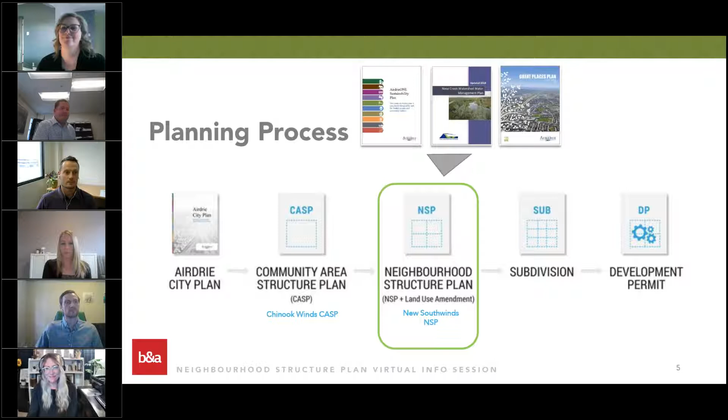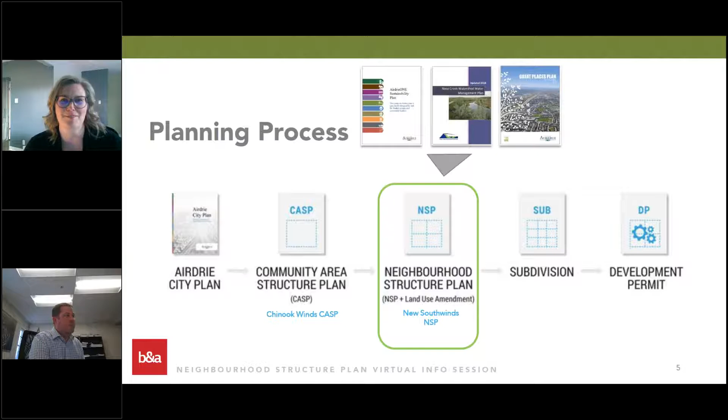So the planning process, where are we? We are currently at the neighborhood structure plan phase. Planning within all municipalities has a process. From the moment lands get annexed and then become a reality, they all fall under the city plan. The city plan is the guiding policy that guides all things within a city. From that, the next level is a community area structure plan, and these lands certainly fall within the Chinook Winds CASP. After that, we get a little bit more fine grain. We have the neighborhood structure plan. And then we keep going down the process till we get to development, houses, parks, and all those other things. When we're at the neighborhood structure plan phase, there's also a number of guiding policies that we look to and try to adhere with.

Here's some of the examples that we've noted, between the sustainability plan and the Great Places plan, and certainly there's always a watershed management plan that we have to adhere to for each development within the city. So today we're going to talk about the neighborhood structure plan. I hope to give a little bit of clarity too around other components of our adjacent lands. So I'm going to jump right into that.

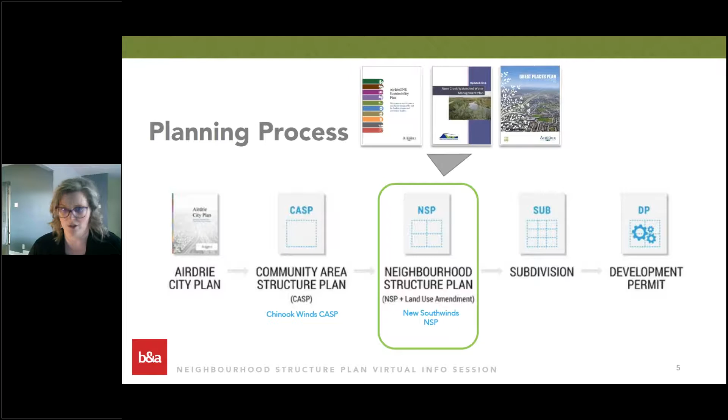So location and context. I know there were some comments that we've seen in regards to the names. So the fuchsia area is our Chinook Winds CASP boundary. Within there's a number of communities: Chinook Gate, Cobblestone Creek, Prairie Springs, Windsong, and South Windsong. And I know we've heard some comments about, we actually don't call it South Windsong, we call it Southwinds. And so I would say by planning policy, it was named Southwinds originally, but that's the only place it stands. I know the community next to us is Southwinds, and our intention is to extend that and have Southwinds be the community in the southern portion of that community area structure plan. And so hopefully that gets some clarity. The only other place that you'll find that, I think, is very detailed documents that Mattamy submits to the city.

So certainly it's not as if you'll see South Windsong in other places. So the lands that we have here, we have three landowners: Mattamy's got a portion, the city of Airdrie does, as well as the Rocky View School Division. And so between them all together, we have a plan that's sitting about 155 acres. I've got a few site photos. The interesting thing about the land, the majority of it is flat. There are a couple of natural features. There's certainly the dry creek that is diagonally crossing the site in the northwest corner. There's also a low point that sits in the bottom southeast corner, and we've got some high points with a couple of knolls.

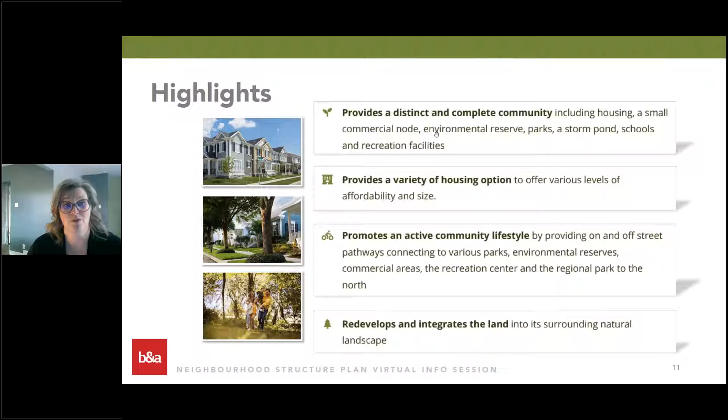Promoting an active lifestyle, we design our streets and pathways to connect well, ideally in an efficient grid. On-street paths and pathways give opportunities for bikes, pedestrians, and vehicles. We also integrate the land with the natural landscape where it's available, addressing and celebrating it through our plans.

There's an opportunity to also enhance those natural areas. Sometimes not every natural area is the nicest natural area. I've certainly seen many storm ponds or wetlands in my day that could be enhanced, so there's an opportunity there as well to actually make that an even nicer creek area throughout the plan.

And then creating social interaction and a sense of community, and that comes from nodes and open spaces. When we can offer places where you can gather, meet for a coffee, that becomes the heart of a community. Those are very important for maintaining a strong sense of community.

And then finally, utilizing infrastructure effectively. That's something the city wants us all to do. If we have efficient services, they have efficient maintenance. So certainly the services provided to us, we want to make sure we can connect in, and that relates back - there are times we might design things and the engineers say, oh, you've got to do something a little different because I'm not being as effective as I could be. So certainly plans change, and that's part of the piece.

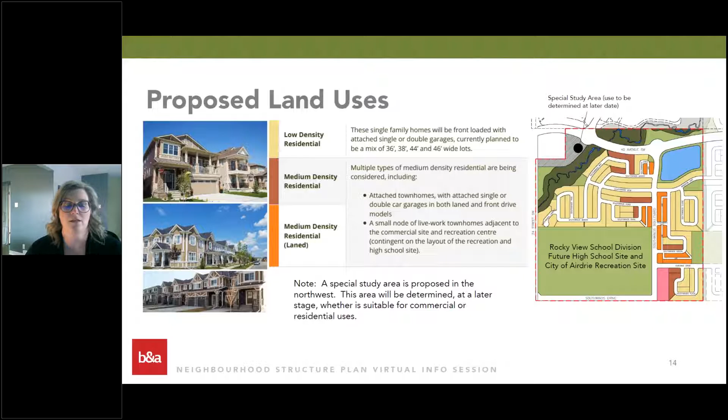This is showing a little bit more detail around those proposed land uses. Mattamy has built a number of product offerings within their other two communities next door, between single family homes that range in width from 36 to 46 wide lots, and medium density, which is our row homes - you can get those in laned and laneless, a couple different options. I'm going to switch this one.

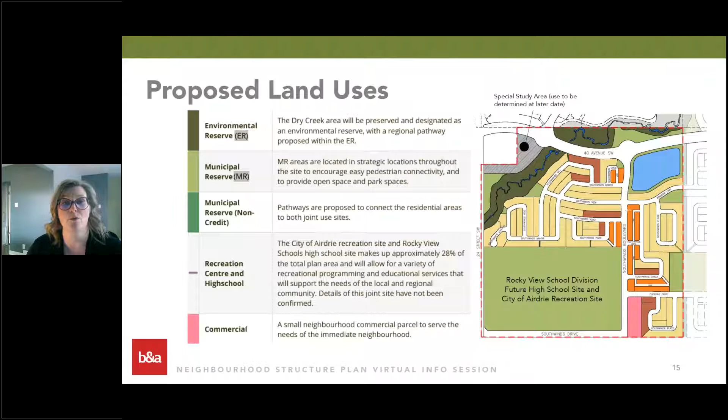The environmental reserve is also categorized, and our municipal reserves, which you'll see in the lighter green, and our commercial sites. So the product would be very similar to what you know adjacent to the site, and certainly if there are opportunities for different product within the market, that's something Mattamy continually looks at, seeing where the market is wanting to go, or what kind of houses the market is wanting to buy.

Open space and connectivity - let's talk a little bit about that. I mentioned how we try to get communities well connected through sidewalks, pathways, and locations to park spaces. This gets fun when you start to add the radius around parks, but it's our goal that every resident has an opportunity to reach one or two open spaces, if they can, within 5 minutes of their house.

That's where, when we talk about thoughtful locations of open spaces, you'll notice we have them scattered throughout. All of the roads have sidewalks on both sides. We focus pathways along major roadways, so you'll see the green that follows along the collector roads. You'll also see that we have pathways that can run through the environmental reserve, take advantage of utility alignments, and sometimes loop around storm ponds - in this case, we have it on a couple sides. So open space and connectivity becomes a big component when we design communities and try to figure out the right balance for residents to have that quick access.

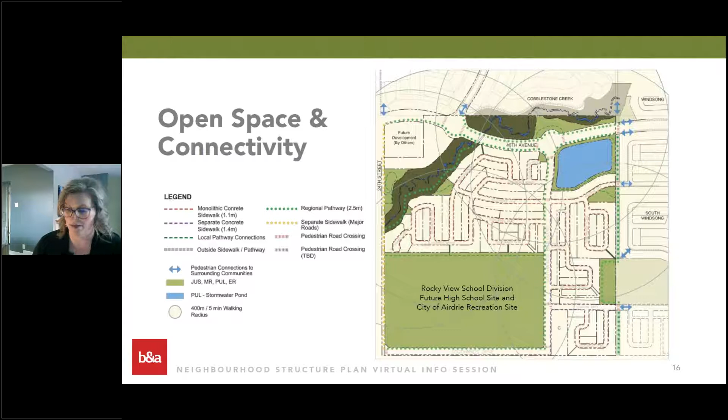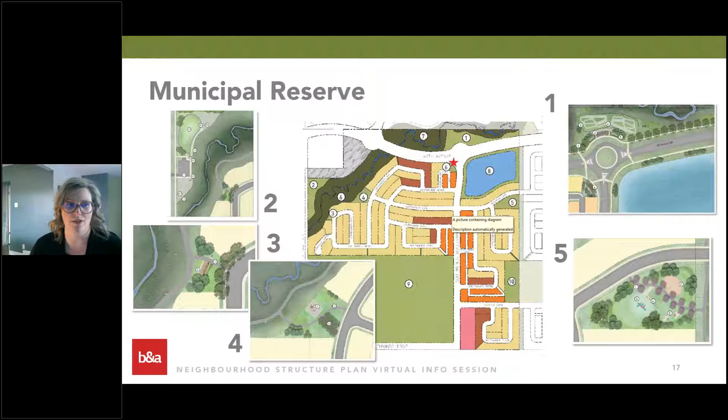The environmental reserve pathway, as you can see, will tie into the community and loop along Dry Creek, and it's proposed to extend all the way down as it connects up with 24th. There will be pathway connections that lead you back into the community, giving an opportunity to really take advantage of that amenity space through the environmental reserve.

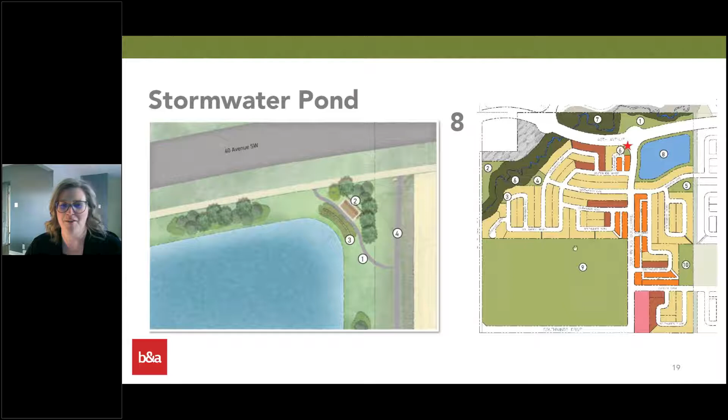This is the joint K-8 school site, that's the number 10 I was talking about. A majority of that site was provided with the neighborhood structure plan to the east. We had a requirement to finish off the soccer fields or play fields, and you can see the fields actually overlap between the two sites.

We have a regional pathway proposed as well, and it will also come up the utility alignment on the east side, loop around, and connect to the easement to the south. So it's centrally situated, falling between the two neighborhood structure plan areas, but it will allow for the full development of that site.

This school, I'll just note, hasn't been designed yet. That comes when the school is ready to be funded. But the school is located on two collector standard roadways within the community.

So let's get into transportation. A majority of our big high-level transportation is established in the community area structure plan. Within the CASP, it was identified that 24th Street and 40th were going to be arterial standard roads. We haven't exactly worked through the final details on the cross sections of those roads; those are being looked at from a design perspective right now.

But off those roads is where we find our internal system. We have collector standard roads that follow the north-south alignment of the community and come back along the rec center and high school site. Collector standard roads are needed for bus routes, and especially for volume, to get residents efficiently and effectively into their communities and back out. There's also one that will head east into existing Southwinds.

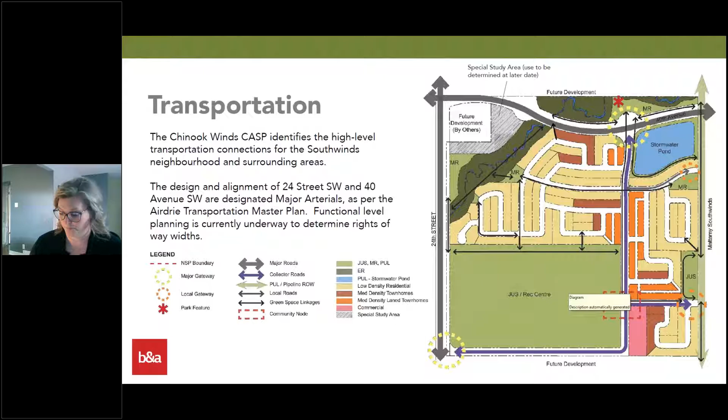Transit, as I noted previously, likes to follow collector standard roads and arterial standard roads. So we've certainly made allowances for transit to be routed through the community, with stops located in positions that will capture the most residents and ensure it's a quick walk to get to a bus stop.

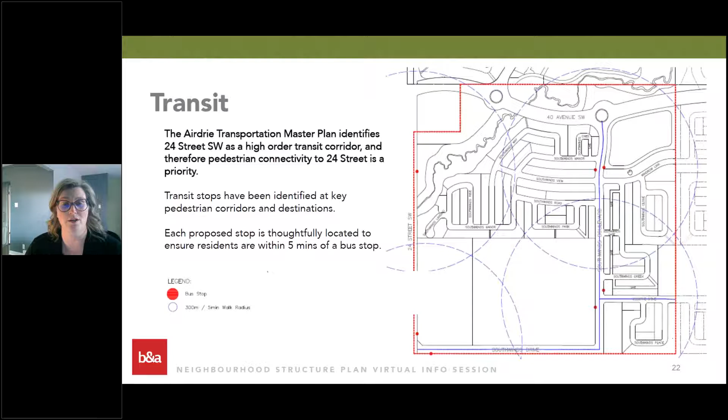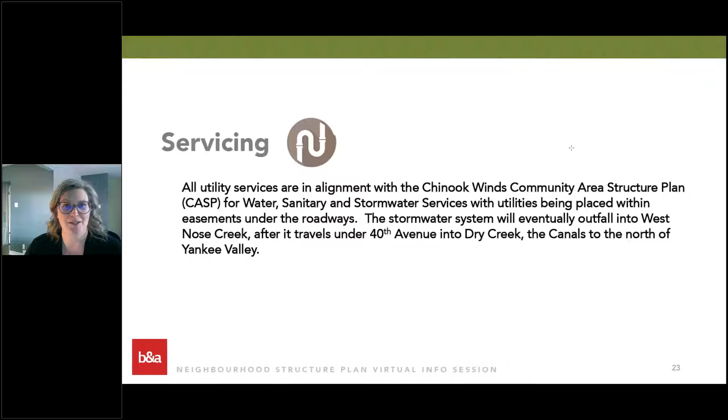Servicing actually worked out really well for this area. It aligns with the community area structure plan and follows all standard easements within the roads. As noted, the stormwater will travel through the communities to the north and eventually end up into West Nose Creek.

From a servicing perspective, it was well planned out at the community area structure plan stage, making it easy for us to make all those connections. From a development phasing perspective, it's typical that we tie into where services are available, and that's where we've proposed phase one. Phase one will be sitting adjacent to the existing community, and then we'll build out.

Typically when phases are done, it's all about getting the roads and pipes in, and then the lots follow after that. So it's sequential. Ideally, the east side of the plan will develop earlier on, and then we'll work our way across. We've put the rec center and the high school site in the 9th phase.

Depending on timing, funding, and other components, there's certainly opportunity for that to be earlier than the 9th phase. We're going to work with the city to make sure it aligns. For now we've put it there, but that doesn't mean it's necessarily the last phase of development. I'd like to open it for questions.

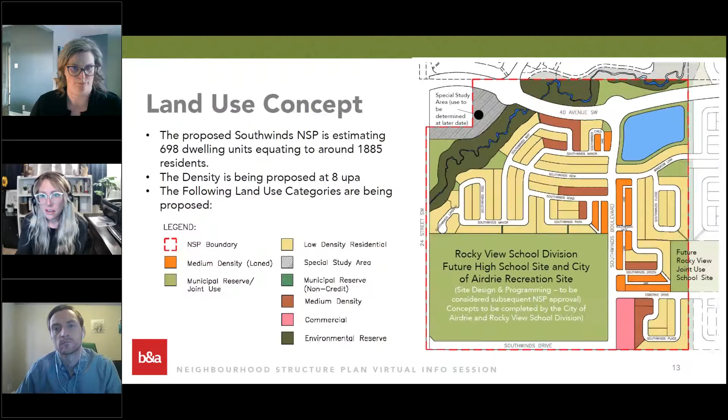So Tamil, I don't know if you've had questions come in for clarity. Sure, we had a couple come in, and I assume people are still absorbing the information. It's a lot to take in, but if you don't have your questions prepared tonight, we can collect them through an online survey, or you can reach out to me directly. This is the opportunity to ask your questions. We've got all the sub-consultants and Matt from Mattamy on the call right now, so maybe we'll get everybody to turn their cameras back on so people can see our faces while we answer. I'll just start at the top of the questions we've got so far.

The first question is, will the community sign on the corner of Winford and 8th Street be changed to reflect the community name Southwinds Song? We've been getting some questions about the naming, and Kathy addressed it earlier, but maybe Matt wants to speak to it. It adds a little confusion, but I don't think there's any intention of changing it over to Southwinds Song. Is that correct, Matt?

Yeah, I can speak to that. The plan essentially is for this community to be an extension of the existing Southwinds community, just directly to the east. So the plan is that it would look and feel and essentially be considered one community. We wouldn't be changing any existing signs to say Southwinds Song or anything. The plan is that this is an extension of that same community in look and feel, and we'll be marketing it the same way as the existing community, as Southwinds. Hopefully that clears it up.

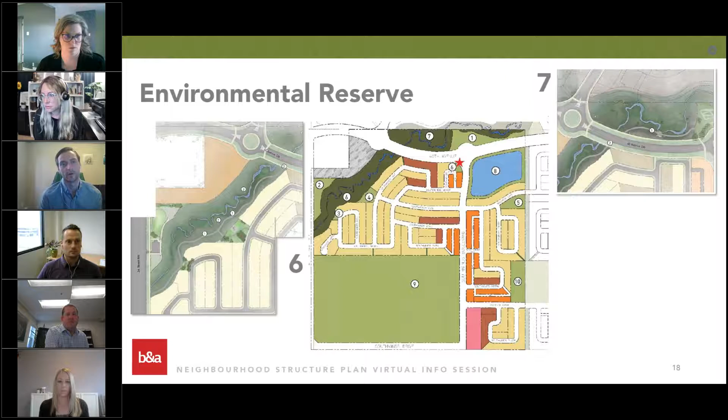Yeah, so essentially once all the boundary roads around that site are in place, we would look at landscaping it. I do know that site is a high priority on Rocky View School Division's list, so we would probably expect to see some action as far as that school moving within the next few years. I can't speak on exact timelines, but the answer regarding landscaping is yes, once all the roads around that school site are in place, we would look at landscaping that in the meantime.

And Matt, would that include the pathway connection? Yeah. Okay, awesome. So hopefully that answered your question.

Thanks so much. Where will construction traffic be routed primarily? Do we have that answer at this point? I would pass it over to Matt or Stephen.

Yeah, I can speak to that. So it hasn't been determined, but there's really only two options, either through 40th or 24th Street. My guess is that it would be through 40th because 24th is not paved along the boundary of the site, but we're not that far along that we've totally figured that part out, but there really are only those two options.

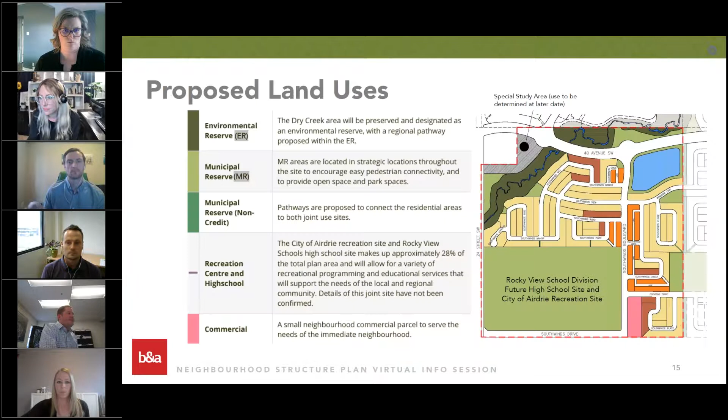We've been asked, do we own or have any plan to develop in future Southwest CASP? Matt, you or I could probably speak to the Southwest CASP. To the question, we don't currently own any of the land in the Southwest CASP area. That's not to say we won't in the future, but currently we don't own any of that land, so there are no plans for us to develop in that area.

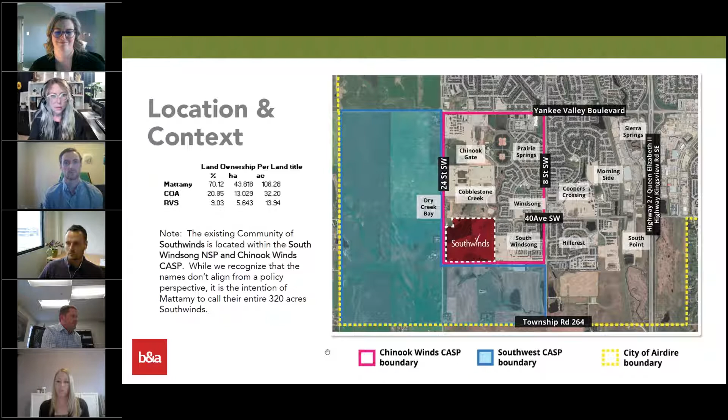Yeah, the Southwest CASP just wrapped up its engagement planning as well. We have a separate website. B&A is supporting the Southwest CASP too, so you can check out their website. I can put the link in if anyone's curious about what's happening on those lands. They're a little further ahead in the planning process, as far as getting to MPC and council, than we are with the NSP. But the CASP is a high-level planning document, similar to what the Chinook Winds CASP outlines for this project's area. They're working on it with the Southwest CASP, so for more information I'm happy to share the website with you guys.

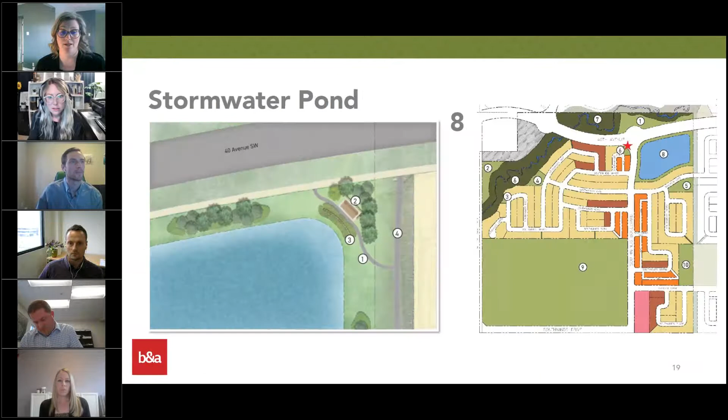Okay, next question. What is the planned community completion and phasing timeline? So maybe we go to the phasing graphic. I'll let Matt answer that one because he has a better handle on how quickly he thinks each of the phases will come on.

Yeah, certainly. So I can speak really just for the residential development of the site. I can't speak at all to the joint high school or rec center site or even 40th Avenue. But the plan is that phase one will likely be starting work around this time next year, so we'll be starting our earthworks program. As far as overall completion of the site, it's always hard to say with certainty, but I would say we'd be looking at probably somewhere between 4 and 7 years for the residential part of the development.

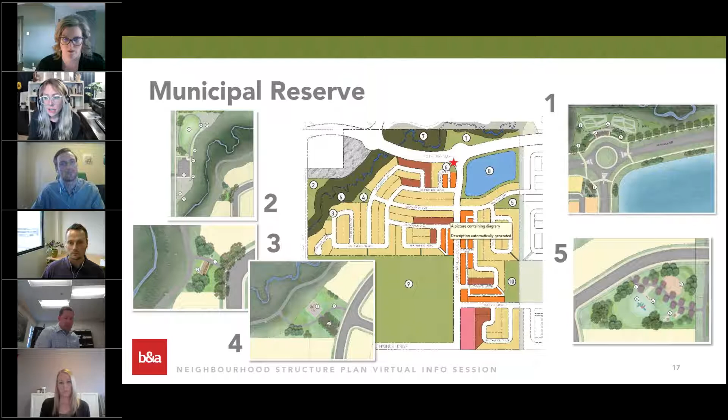Larry just jumped in. His mic doesn't seem to be connecting, but he said for the school division, they'll have a longer timeline than the rec center because they cannot request funding for the building until the site is shovel ready. So that's the answer to that question.

Okay, so hopefully we answered about the commercial. There's a question that went back. I think we were talking about construction, so can we just confirm that construction would likely avoid Osborne Drive? I believe that's what we were saying. Is that correct? Yeah, I would expect that it would be on 40th Ave versus Osborne Drive. Matt, if you agree with that.

Yeah, so without saying that there's going to be no construction traffic on Osborne Drive, we always attempt to take an approach of affecting the least amount of people, and 40th Avenue would make more sense. It'll depend a little bit on the timing of that road and if it's in condition for construction vehicles. But yeah, of course we'll try to avoid major roads or roads that have people already moved in and living on.

There'll be localized expectations of construction traffic, and that's the purpose of some of our higher order roads, 40th and certainly the collector standard roads. So that's where we generally want to put most of the traffic, and you can certainly direct them as well if need be, if there's a shortcut that exists.

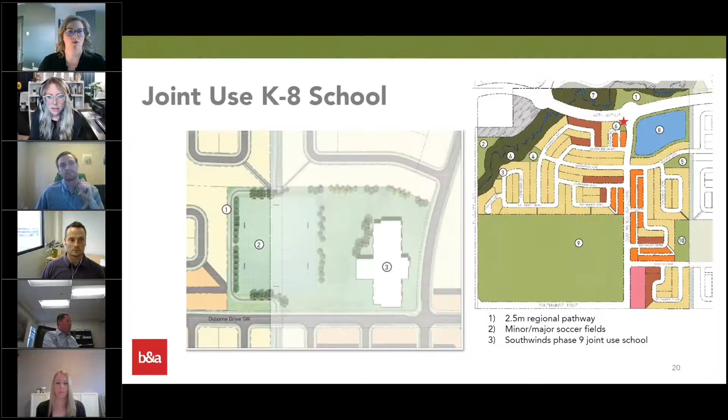Yeah, so I can speak to that. I believe the question is about the piece of land that's just south of Osborne Drive, entering into Southwinds. So that piece of land is not owned by Mattamy, that's a privately owned landowner. I believe that land was recently listed for sale, but I don't know the status of it and can't really speak to it. So unfortunately there's no plan available right now, and I can't speak any further on that because we don't own the land.

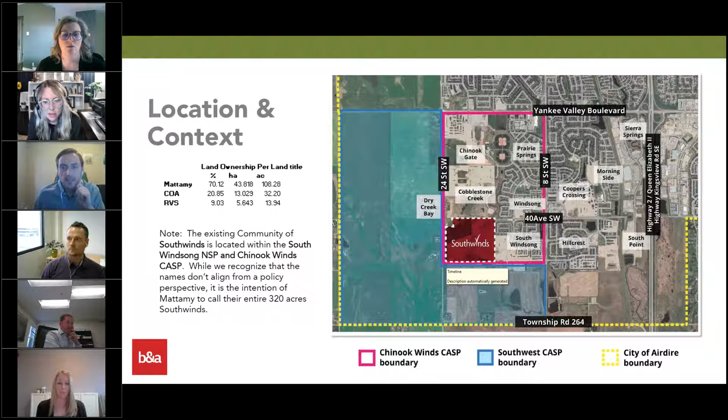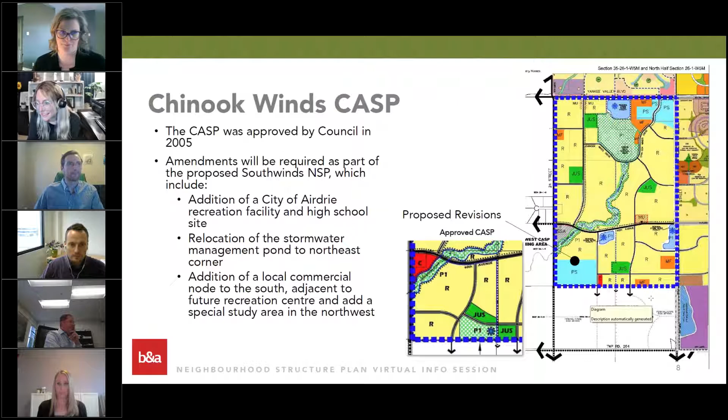I'm just looking where your mouse is pointing, sorry, I was answering a couple of questions. It's okay, down here, correct Matt? In this bottom corner. Like on the north side, is that what we're saying, or were they asking about south in the southwest CASP? So the question is, it's just a little holdout parcel of land contained here, just south of our Southwinds NSP area. Okay, so it's in the southeast corner of that. Over in this corner? Yeah. Okay, yes, that's right. Great, thanks so much, just wanted to make sure we were all looking at the same spot.

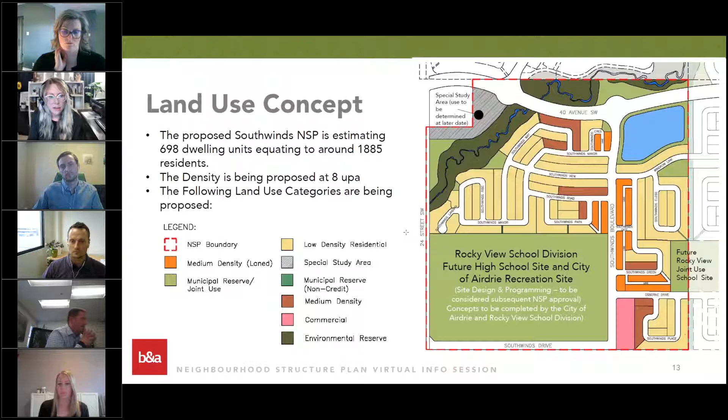Okay, so someone just asked, where do we get the survey, what page? So I did just post a link to the survey in the chat function for all participants, but it'll also be posted on the website tomorrow. Kathy, on the very last slide, I believe it's called Get Involved - I'm gonna race through these, sorry, I raced through them like crazy. There's the website right there. So if you go to southwindsnsp.com, tomorrow morning we'll get the recording of this video and the link up. I could actually probably get it up tonight if I have a couple minutes after this, but it is in the chat function as well.

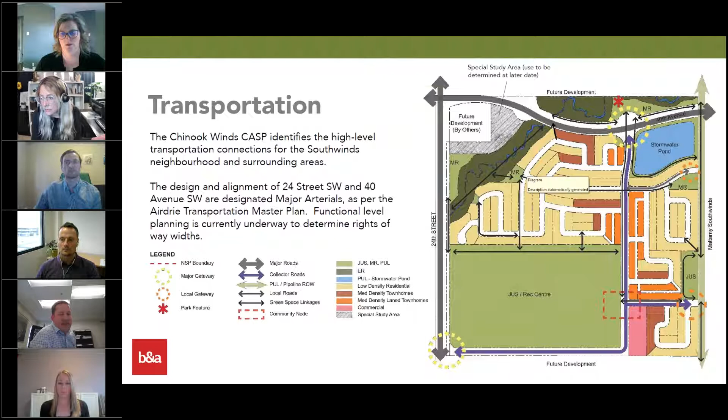Was there a follow-up with that, Tamil? Yeah, she said she can email us a bit later and show what she means. She said it's difficult with cars getting damaged because the sidewalk is right up against the curb.

I think she's referring to it as a leeway, but what we're referring to is a separated sidewalk. The mono sidewalk sits right up against the curb, so if you open your car door or you're walking along the sidewalk, the cars are directly adjacent to it. That's probably what she's thinking.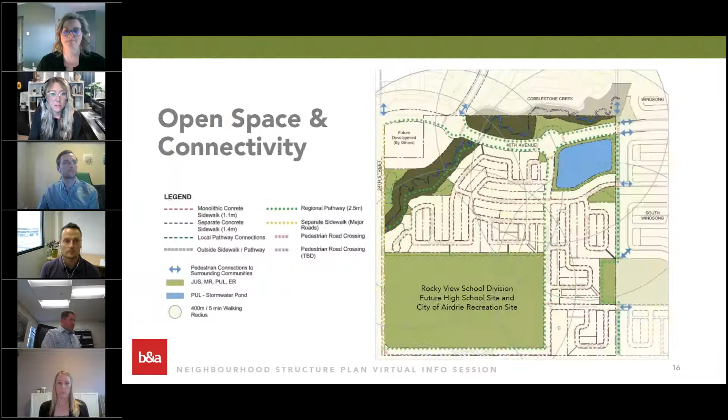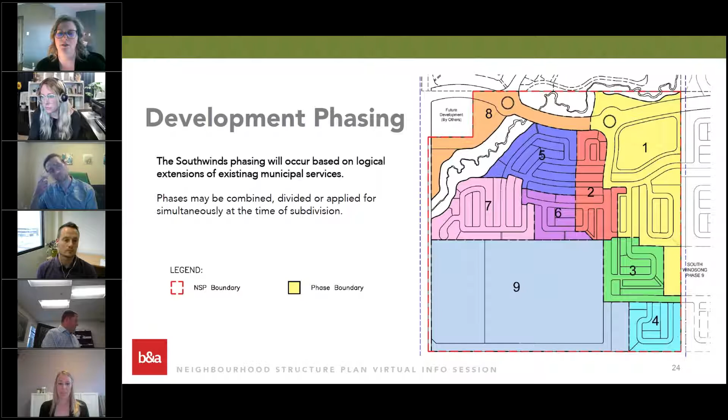Someone just joined the meeting a bit late, so can we provide one more time the timelines for when you're thinking ground will be broken, construction, maybe the phasing? I'll put phasing up, and Matt, you can reiterate what you thought - of course it's market dependent, but you have your best guess as to what you think each phase will take.

So phase one, we are hoping to break ground next year, right around this time. That's our phase one plan. As far as ultimate build out for the residential area, again it's market dependent, so I estimated between 4 and 6 or 7 years.